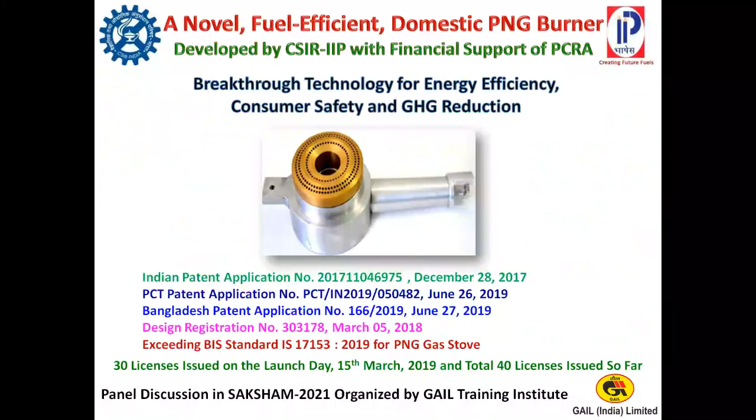Okay, so as I said, we wanted to study the problem of use of LPG burner for PNG by jet enlargement. As you can see, when we are increasing only the jet, what will happen? We are increasing the fuel flow rate. But since the burner is not optimized, a part of this fuel, what we are giving, that will go as waste. So that will be a decrease in thermal efficiency.

So we wanted to improve the energy efficiency, and since the fuel is going unburned in the room, there are certain issues which we will discuss - what are the safety issues. And of course, this fuel going unburned means you will have greenhouse gases. This will go in the form of CO2 or in the form of methane, which are greenhouse gases.

So we developed a burner about which I will talk today, and why we are calling it a novel fuel efficient domestic PNG burner - because this is not an improvement on the existing burner, this is altogether a new technology, new burner, developed from scratch. That is why we are calling it a novel fuel efficient burner - a technology for energy efficiency, consumer safety, and greenhouse gas reduction.

We have filed several patents on this: Indian patent, PCT patent, Bangladesh patent. We have a design registration, and we have a standard for PNG. When we started use of PNG in 2011, there was no BIS standard. In fact, BIS standard came in 2019, so there was no standard then, and anybody was using whatever they wanted without following any standard. So we followed the BIS standard, and we are exceeding the standard. We have issued 30 licenses for this, even on the launch date, and 40 licenses have been issued so far. I will talk about this in detail.

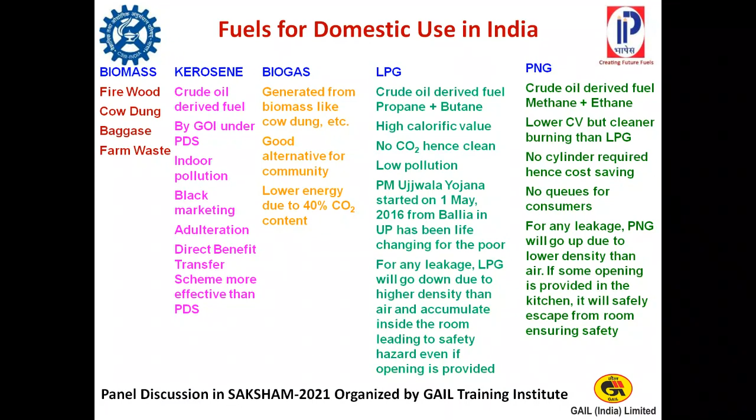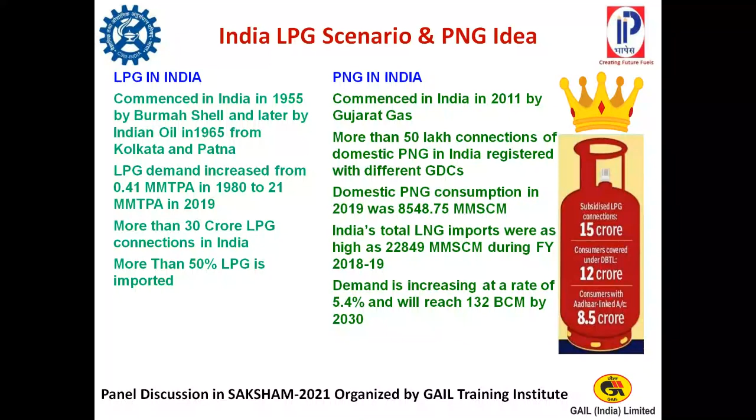Demand is increasing at a rate of 5.4% and will reach 132 billion cubic meters by 2030. So that is the scenario we have.

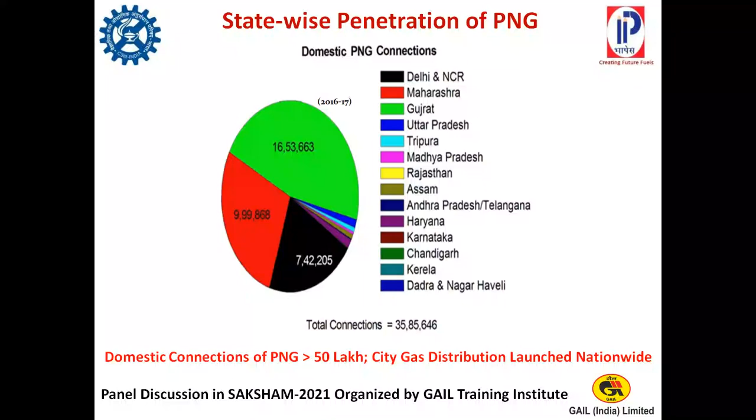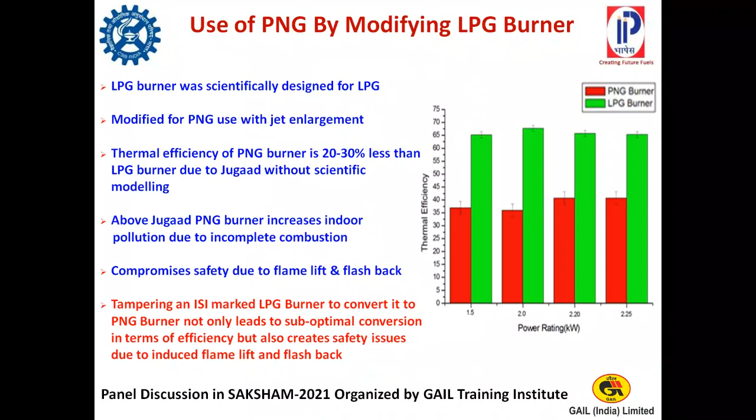So we will call it a Jugaad PNG burner by jet enlargement of an LPG burner. See, at a time when we have some problem, we have to find some solution. So in 2011, and even till now since there was no PNG burner designed by anybody, it was a good idea - a flexible approach to problem solving that uses whatever is available to us in an innovative way. But the only problem is it was done without applying scientific modeling knowledge.

That was the problem. So we realized this problem, and with the help of PCRA, we designed for the first time an original patented scientific innovation based on the latest scientific modeling. So we did the scientific modeling of each and every part, designed various parts, and then finally came out with a burner, and we tested it in the laboratory and in Delhi at various locations, and that is how this burner came out.

So let us see why we want to, in the first place, use PNG. Why the idea of PNG to replace LPG? What is in it - whether it is advantageous or not.

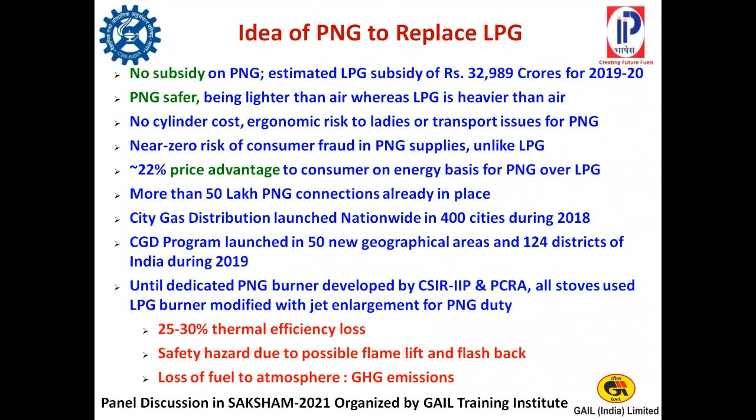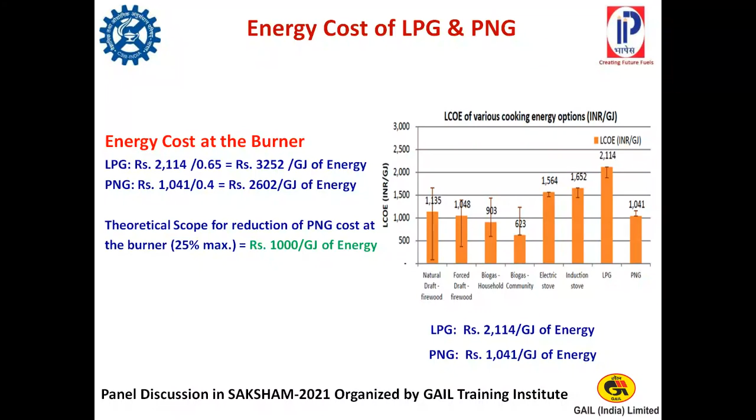So we decided to develop a new burner, a new PNG burner dedicated for PNG use, and we hope to achieve efficiency improvement of 25%, that means at par with LPG. PNG burners should give 65% efficiency.

There should be no compromise on safety as seen in the jugaad PNG burner due to flame lift and flashback. Then, similar production cost as the LPG burner. We will recover that 1000 per gigajoule of energy, and we will have all the ranges, 1.5 to 2.25 kilowatt capacity, as we have for the LPG burner.

We also want to ensure there is no duplication in the market, so we will have scientific design authentication by CSIR, IIP and PCRA hologram. We would meet the BIS standard IS 17153:2019. In fact, we want to exceed the standard so that getting the ISI mark should be a cakewalk. We also wanted a trademark name for the CSIR, IIP and PCRA logo.

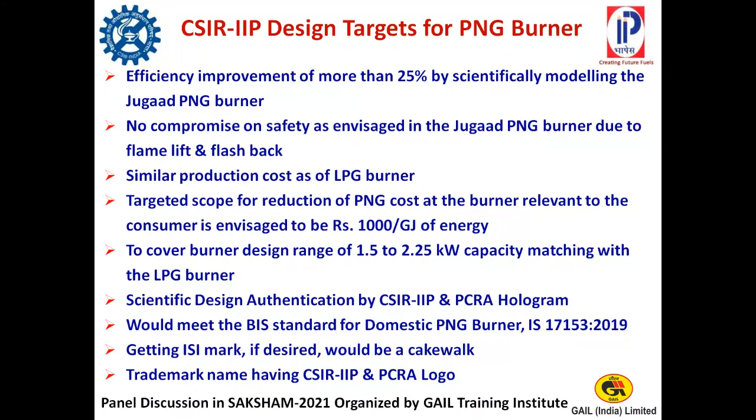So what we did was examine each and every part and how it can be modeled and optimized. Let us first see the jet, which was being enlarged, but that was all hit and trial. To know the exact diameter for PNG, it has to be based on the calorific value, mass flow rate, density of PNG, and also the Mach number and speed of sound in PNG. So we formulated the equations and solved them.

Similarly, for the mixing tube and gas manifold, we designed for PNG supply pressure, mass flow rate and density. The PNG supply pressure is different from the LPG supply pressure. This mixing tube is special, it has a throat. Since the mass flow rate required for PNG is more than double, because the calorific value is less than half, we need more air supply to handle that fuel. So to get more air supply, we created a throat for more air entrainment, and then a divergent section so the injector is supported and there is no leakage. So we developed this special kind of mixing tube.

And for the burner cap or top, we determined the number of holes, hole diameter, the distance from one hole to another, called pitch, the surface area of the cap, the angle, the depth, etc., all needed to generate a stable flame so there is no flame lift across a range of gas flow rates.

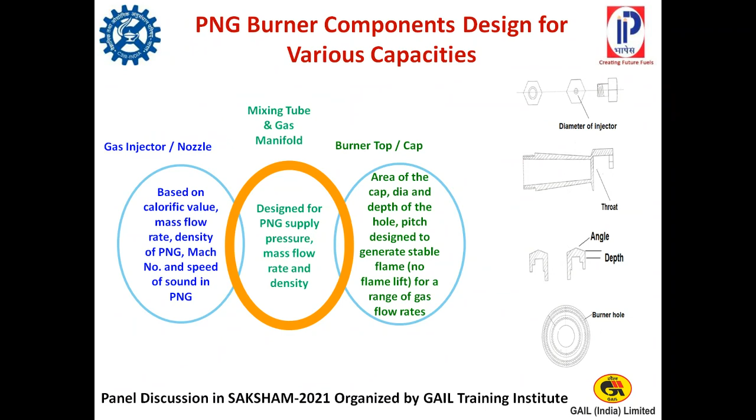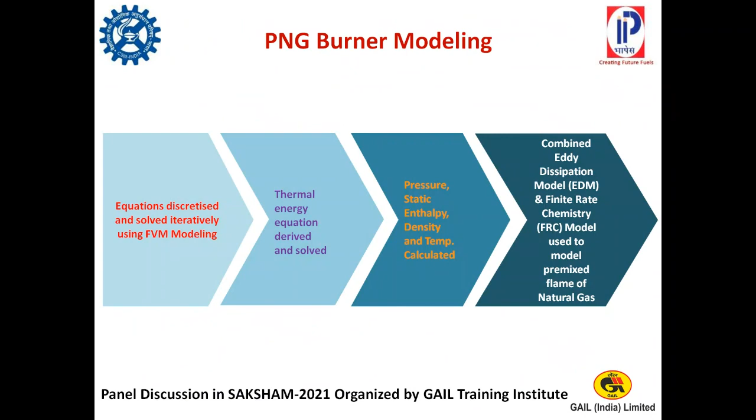That had to be designed, so we did CFD modeling. We formulated equations, which were discretized and solved iteratively using the finite volume method. Then thermal energy equations were derived and solved. Pressure, static enthalpy, density, and temperature were calculated. Finally, a combined eddy dissipation model (EDM) and finite rate chemistry model were used to model the premixed flame of natural gas. Now you can see the temperature profile here.

Now what we want, when you put the burner, the utensil over the burner, there is some gap between the utensil and the burner. This gap is from the burner top to the bottom of the utensil. This has to be designed so that we get a better temperature profile and enhanced heat transfer. And this is different for LPG and PNG. This gap is different.

So that was designed. And then what should be the orientation of the burner ports? What should be their angular position? That was optimized for efficiency improvement.

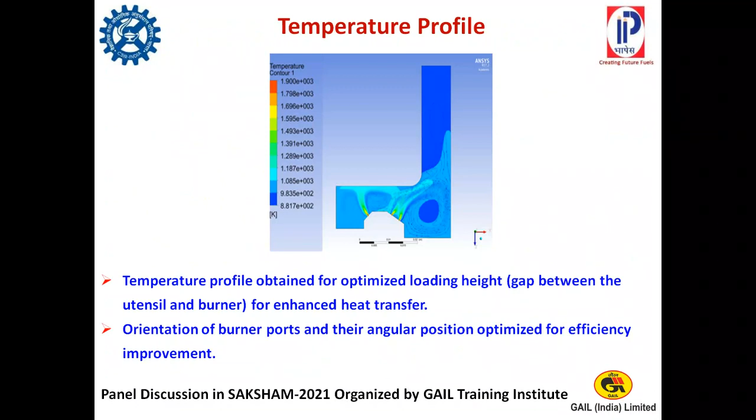Now you see here, this is a very interesting diagram. The LPG burner is designed for 30 millibar inlet pressure. Now we have replaced LPG by PNG, but the PNG supply pressure is only 21 millibar, not 30. So what happened? When you use the LPG burner for LPG, you get a very good flame. But when you replace it with jet enlargement and supply natural gas or PNG, you see the flame lift, the flame goes like this. So this is not good, and that is why we are wasting the fuel.

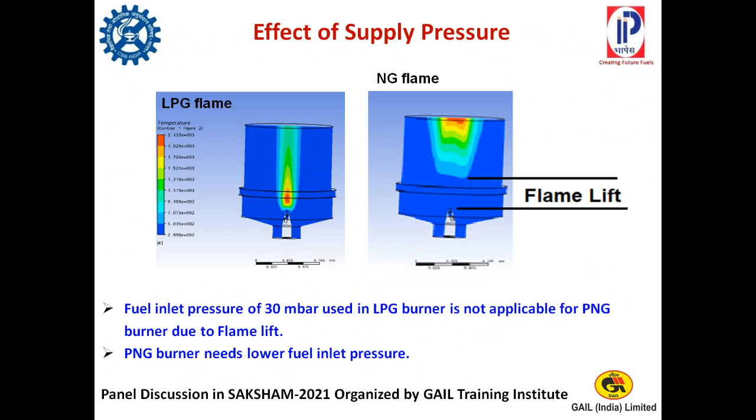So the PNG burner needs lower fuel inlet pressure, it has to be designed for 21 millibar. We designed the various components by CFD modeling, and you can see them designed here. The burner is designed for 1.53 kilowatt, 1.82 kilowatt, 2.06 and 2.25, as that of the LPG burner. So you can see all these components are different from LPG.

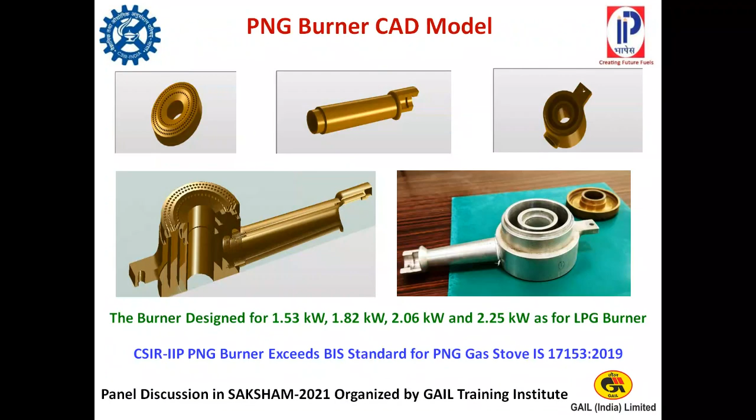Then the question was how to test and find out the thermal efficiency in the laboratory, since we don't have a supply of PNG there. But what is PNG? It is piped natural gas, so it is basically natural gas. So we have a CNG cylinder, compressed natural gas, and if we can reduce the pressure and bring it to 21 millibar, we can simulate it.

So we had a system here, and you can see the manometer. We are maintaining the 21 millibar pressure and adjusting the flow rate, and then we can calculate the thermal efficiency. This measurement system of thermal efficiency was also designed by IIP.

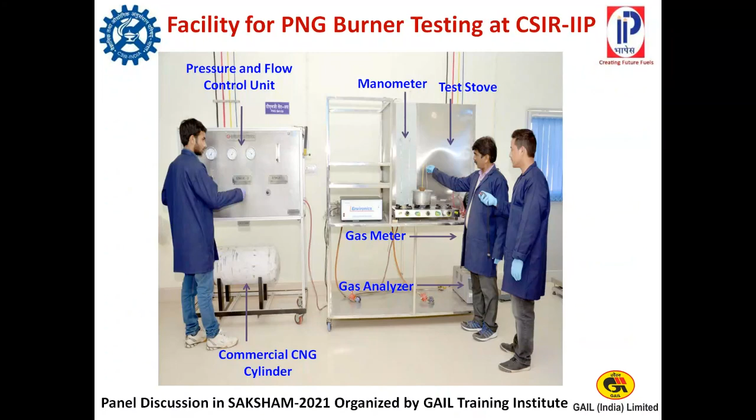So we calculated with a LPG burner modified for PNG use, and compared that stove with our dedicated burner, and found that a thermal efficiency improvement of 25 to 30% was achieved. We were getting this benefit. Now we thought, okay, this is the laboratory result, 25 to 30%.

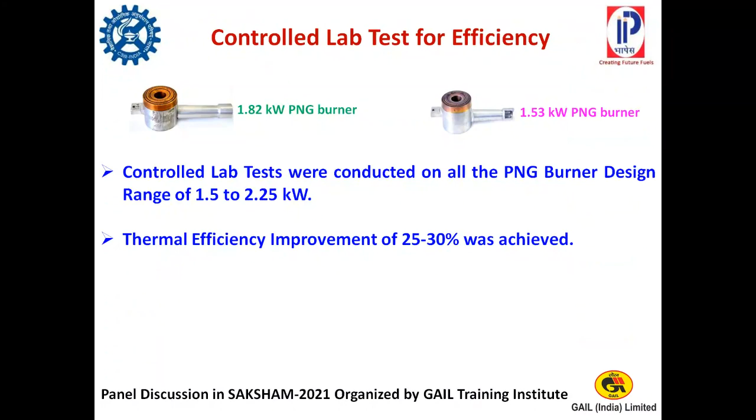But what happens in the field? What is the feedback of the actual user? So we went to Delhi, and we thought let us go to the pantry of the Honorable Minister, Ministry of Petroleum and Natural Gas, Shastri Bhawan, New Delhi. We went there, and it was tested and monitored by PCRA. You see Mr. Surinder Pratap standing here, and there was a team of actual users.

They were making tea on this burner, using both stoves side by side, and there was a separate measurement system. They found that with the existing LPG burner modified for PNG, 0.0039 meter cube per cup of tea was used. With the CSIR-IIP improved burner, it was 0.0027 meter cube, so 31% of PNG saving was achieved. This is an average of large data, and all precautions were taken.

And then we did these trials at various other locations like CSIR, CRRI, and two other locations, and again we got 25 to 30% improvement. So then we thought, what happened?

This is very interesting, that we developed this burner with PCRA. And then PCRA said, okay, now this is ready, let us give it to the gas distribution companies like GAIL, and you supply us a few thousand pieces. Then I thought, how can we supply a few thousand pieces? We have only 2-3 burners, so that will take years.

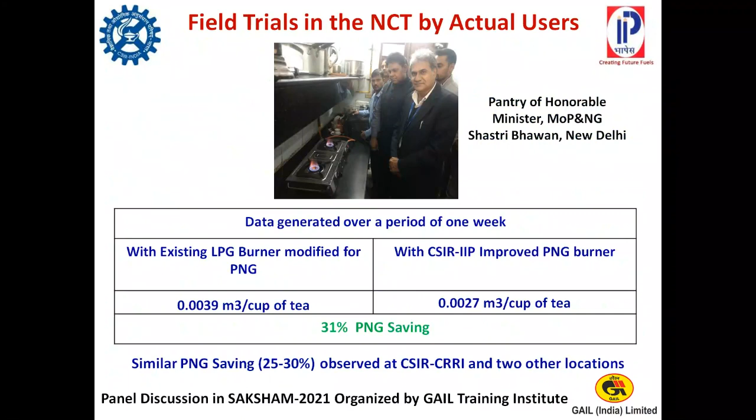So we had to bring in manufacturers. We had to license our technology, otherwise it's not possible. So how to do it? We thought, let us do a unique program. We conducted a seminar, and invited all the reputed 40 manufacturers of LPG burners.

We had a unique program of presentation, demonstration, and on-the-spot licensing of the improved domestic cooking burner for PNG, held on 15th March 2019, with Sri Alok Tripathi ji, ED PCRA, as chief guest.

We made a presentation on our burner and gave a live demonstration, then asked the manufacturers if they were satisfied and saw the benefit. They were all very happy, saying that seeing the blue flame, they were sure it would give the benefit.

Then I said, do you want to take the license? Take it today and I'll give a 50% discount in the license fee. All of them were very excited, and out of 40 manufacturers, 30 immediately took the license on the launch day itself.

This was a kind of history and a benchmark in industry-friendly technology transfer practices. Till date, we have issued 40 licenses, and all the big players have our license, whether Sunflame or anybody else. The product fabrication document containing all design details has been issued to the licensees, and this novel fuel-efficient domestic burner, designed with the financial support of PCRA, meets all BIS standards.

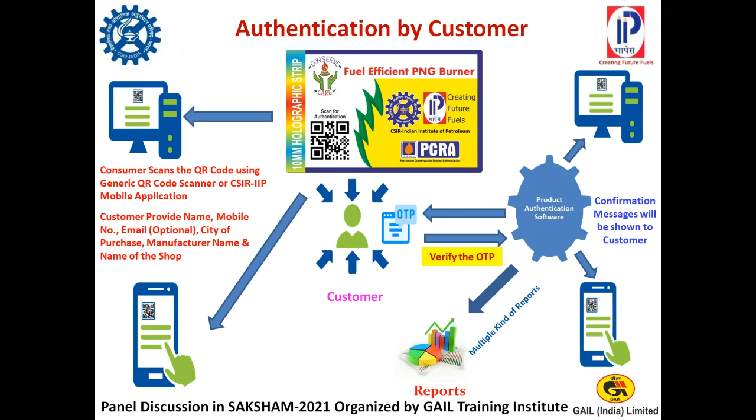In fact, there are 4 manufacturers already selling various models of the PNG stoves in the market. They are available even on Flipkart and other online websites, and also available on order, on request. You can see RS Enterprises and RS Industries, Ritisha Home Appliances, Yash Appliances, Raja Enterprises, and many more are coming up.

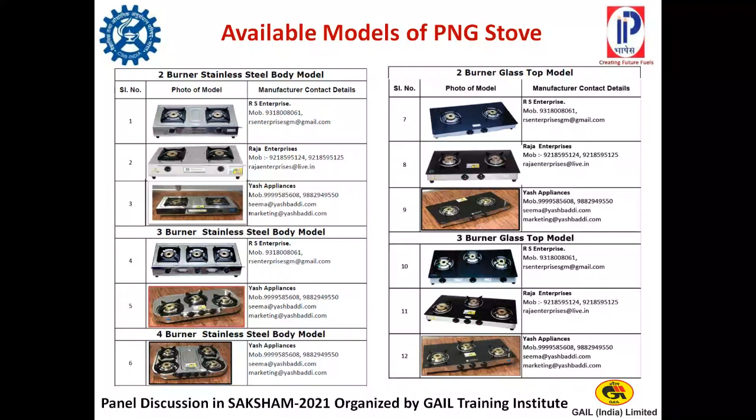So you can see the available models of the PNG stoves already in the market. There is a 2-burner stainless steel body model by various manufacturers, a 3-burner stainless steel body model, a 2-burner glass top model, a 3-burner glass top model, and also a 4-burner glass model. So every model is available in the market.

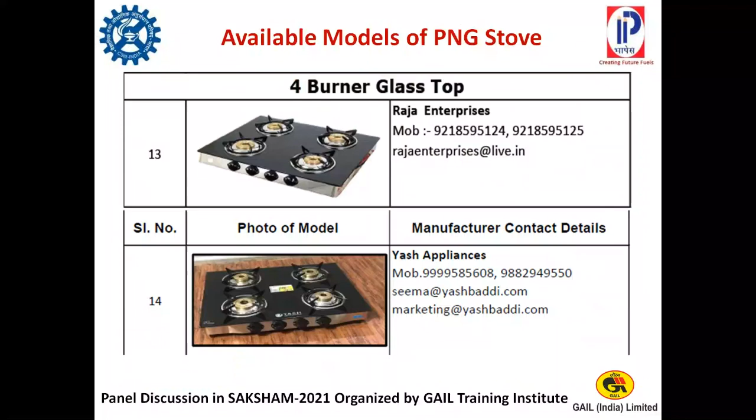Then we tested these stoves, and all of them are certified from IIP. Thermal efficiency of the LPG-converted burner was 40%, and thermal efficiency of the LPG burner for LPG operation was 65 to 67%, so the loss was 25 to 27%.

We had promised that we would give greater than 65%, and we in fact got the same 65 to 67%. So the actual recovery of loss in thermal efficiency was 100%, and we can say we are getting an advantage of about 25 to 27%.

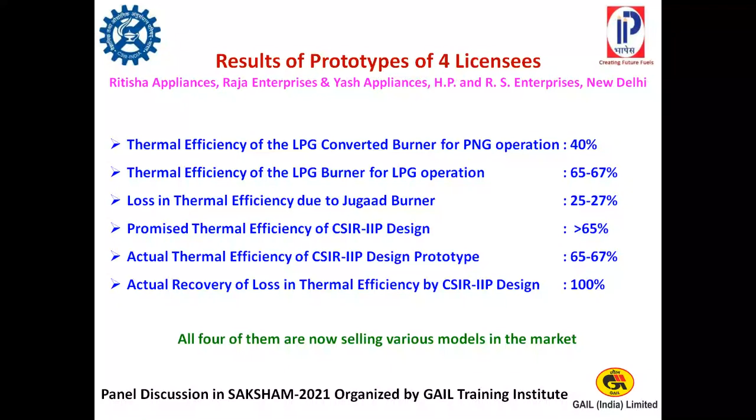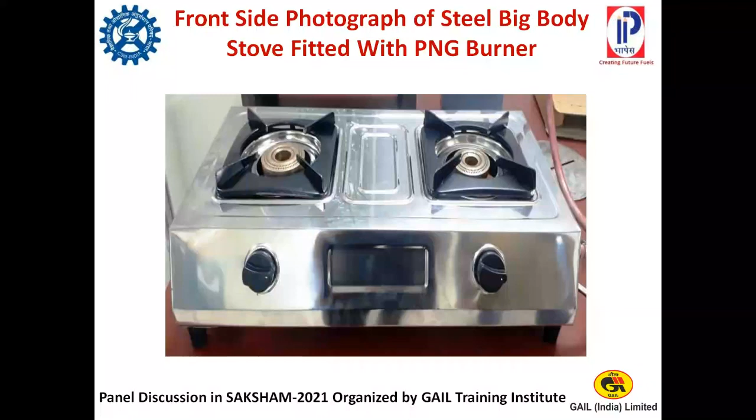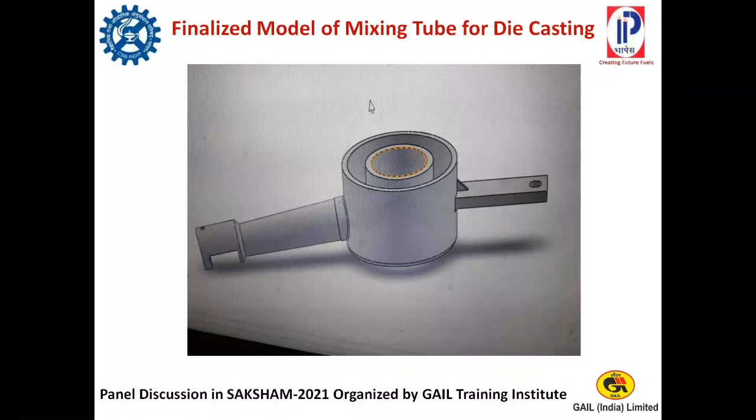All of these people are now selling in the market. This is just to show how this steel body burner, which we tested, looks. From here you can't say if it's LPG or PNG, but if you see the underside, you see the mixing tube, which is entirely different. Finally, you can see this was just the first product, so not so good.

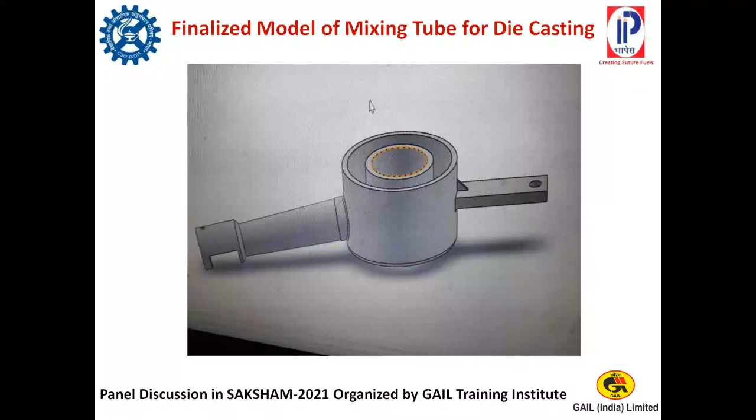Then you see how it was finalized as the model of the mixing tube for die casting. We didn't stop at just the mixing tube or the burner; we also discussed the specification of the total stove with the manufacturers, wanting them to use good material, and all of them used the same material. That is why the stove body weight was also decided.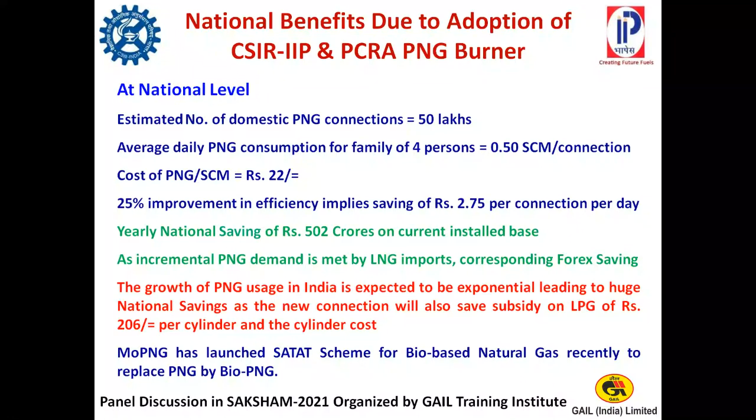There is a subsidy on LPG of rupees 206 per cylinder, and also the cylinder cost. The Ministry of Petroleum and Natural Gas has also launched the Satat scheme. They want to convert biogas, bio-based natural gas, to PNG. What we have done in IIP is develop a technology where we can remove the CO2 in the biogas and convert it into bio-PNG, which can be fed to the PNG line straightaway. So we have also done that.

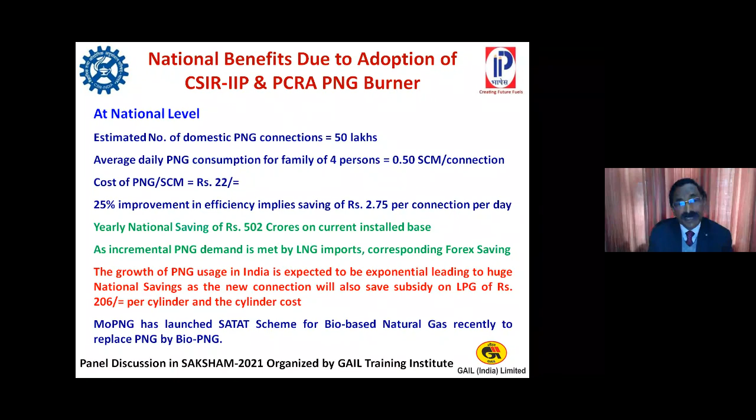Now let us see the savings on yearly penetration of PNG. We know that the CGD program has been launched, and we are estimating that at least 1 crore connections per year is the plan of the government to introduce. If we do that, a 25% improvement will give us rupees 1,004 crores of saving. Subsidy per cylinder is rupees 206 for 12 cylinders in a year, so yearly subsidy per connection will be 2,472.

Assuming that subsidy is available to about 90% of the total connections, we have calculated that the subsidy saving will be rupees 2,225 crores. The cost of one cylinder is about rupees 850, assuming every connection has 2 cylinders, so no cylinder is required now. We will save 1,700 crores not invested on cylinders, so yearly depreciation may be 170 crores. Adding all this, yearly national saving for new connections of 1 crore per year will be 3,399 crores. And if you add that 50 lakhs, this may become 3,900 crores.

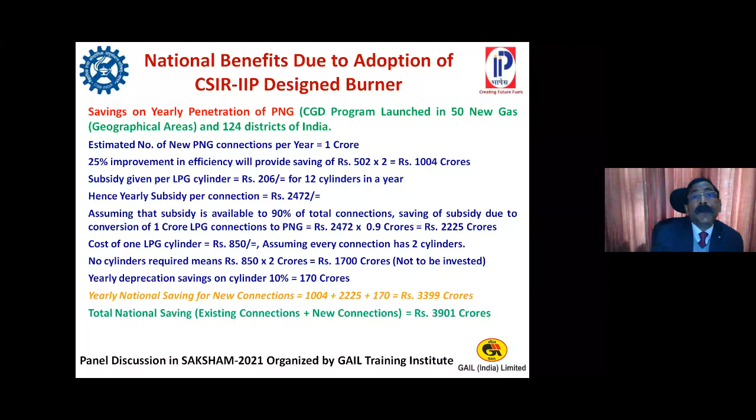Now let us see the environmental benefits due to adoption of the CSIR IIP designed burner. For an average daily consumption of 0.5 SCM per household, total consumption of PNG will be about 182.5 SCM per year, or about 100 kg per year. For an existing 50 lakh connections, total PNG consumption will be around 0.5 million tons per annum. And 1 kg of methane will produce 2.75 kg of CO2.

So 0.5 million tons of methane burning shall produce around 1.375 million tons of CO2 per year. In the in-use inefficient PNG burner, 25% PNG is going to waste. We can assume that whatever is going to waste, about 50% may be coming out as CO2 after burning and 50% as unburned methane. If we add 1 crore connections per year, then 9.28 million tons per year of CO2 emissions will be saved. That is a huge figure.

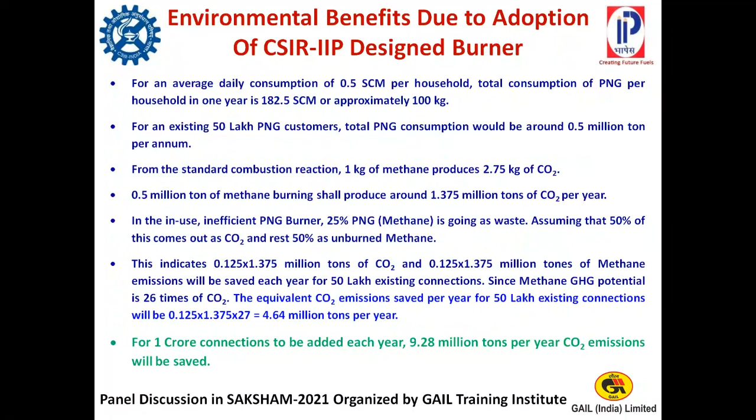So we have a proposal to promote the use of fuel efficient PNG burners in the national interest, as mentioned by Mr. Sastry, who wants to replace at least 10 lakh connections through an MOU with EESL. We want all these 50 lakhs to be changed somehow in some time frame, and additionally, for the 1 crore connections added each year, we have a plan, and it is better if they use the CSIR IIP dedicated burner.

We are taking every care that the stove quality is continuously monitored by CSIR IIP as per the terms of the license, so we will check from time to time what the quality is. It is very important that the consumer is educated through TV campaigns about the 25% saving of PNG by changing their stove. In addition to ease of cooking, they will have better cooking, reduction in indoor pollution, ensuring better safety and clean utensils.

A short film and story on the PNG burner may be provided by CSIR IIP to PCRA or any city gas distribution companies for campaigning on TV and FM radio.

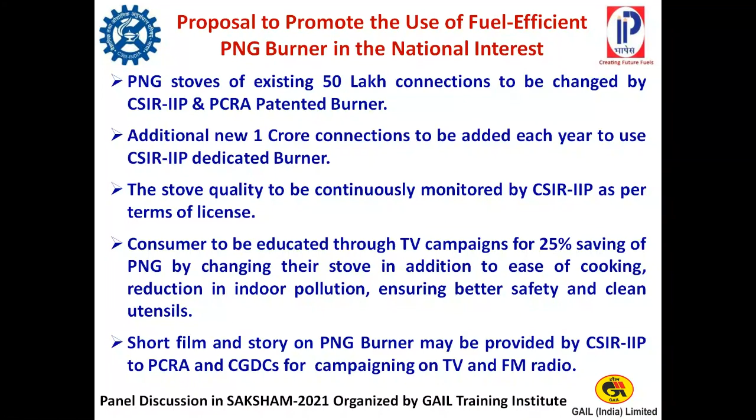So if I go to the conclusions, I can say that as far as CSIR IIP is concerned, we develop and commercialize major technologies for the hydrocarbon industry, costing millions of dollars. But we feel very happy and satisfied to give the nation an efficient and safe product, a novel fuel efficient domestic PNG burner, because it will benefit the common man of the country. The dedicated PNG burner will provide thermal efficiency improvement of 25 to 30% - sir, it is not 10 to 15%, it is 25 to 30% - and will eliminate flame lift and flashback compared to the converted burner.

Adoption of dedicated PNG stove for 1 crore connections to be added each year will lead to savings of approximately 3,400 crores, and 9.28 million tons of CO2 will be saved. Various steel and glass body models of the fuel efficient PNG burner are now available, and our licensees are eagerly waiting to give bulk orders, because every licensee has a capacity of about 1 lakh stoves per month, so giving 10 lakh stoves will not be a problem. The MOU signed between PCRA and Energy Efficiency Services Limited for nationwide introduction of this novel fuel efficient PNG burner will create a platform for the benefit of manufacturers and consumers. This is a very welcome step.

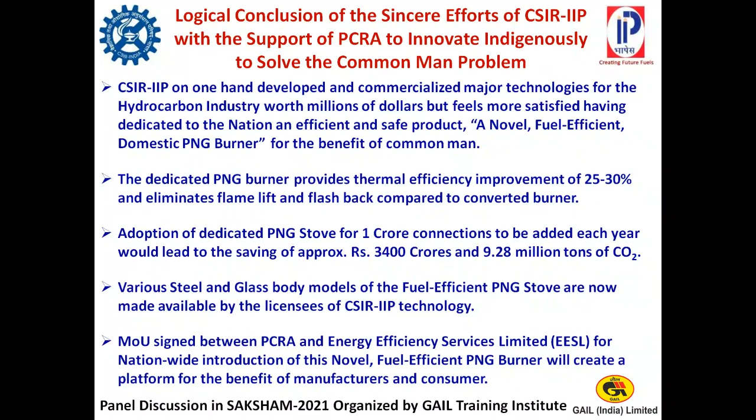Thank you very much for your kind attention, and I request the wholehearted support of everybody connected today for nationwide introduction of this novel fuel efficient domestic PNG burner for major national impact. I know there will be many questions, and I will be very happy to answer all of them. So I invite you to participate. Thank you very much.

What is the cost of this PNG burner? The cost of the steel body burner is around rupees 1200, which is the same as the LPG burner. There is no difference.